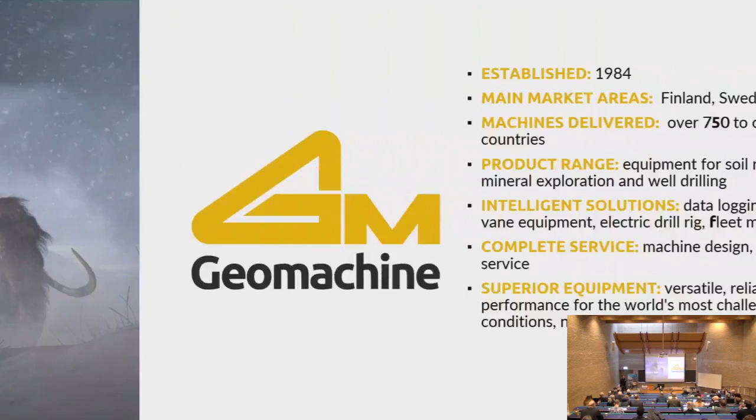So it turns to be 40 years old company this year, mainly operating in Scandinavia, also some rigs to Canada. Russia used to be the market, but no longer. And really the product range has been more in the soil research, in the geotechnical drilling. And also Geomachine has manufactured a few, let's say, traditional geothermal rigs to the 400 meters deep and so.

And where we come to this deeper geothermal drilling, we call it semi-deep. So we are drilling about 2 kilometers deep holes with our drill rigs. So we come from a different angle. So most of the discussions today have been about how to come from the oil and gas industry to geothermal.

And in Finland, I just checked, there's about 10,000 geothermal wells drilled each year. And normally it's been raising, so it used to be 10 years ago 200 meters, now I think the average is about 300 meters or even more.

And many companies are now targeting deeper, and we saw this Espoo exercise with ST1, they tried to go to 7 kilometers, and actually the drill rig is kind of developed based on those experiences. And we saw earlier that the cost curve really, it's not linear, so the deeper you go, the higher the cost curve goes.

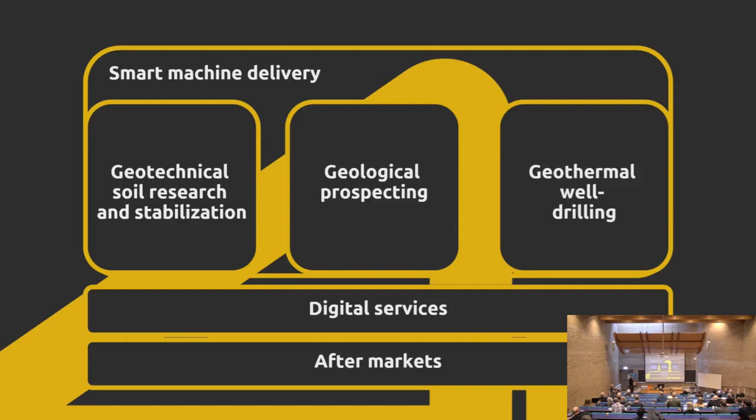The rest is more about this GM2000. This is now the only product we're making for geothermal. We actually quit manufacturing the GM400, which used to be the normal rig, and this is what we're putting our bet on.

About the market needs, why we decided to go this way is because we see geothermal as the future. One of the main drivers is that instead of drilling 60 holes in a new area, you can drill 1 or 2 holes. There really isn't enough area in the places where you need geothermal energy. Based on our customers' calculations, for 300 meter wells, you can actually get the same energy amount from 1 hole that you would get from 60 traditional holes.

Now that we have the rig, we've been marketing it quite actively, and we've started receiving contact from different companies for different applications. We started only for geothermal, but now we have a couple of projects starting or in the offering phase for using deep holes as carbon sinks, one for hydrogen storage, and also one project starting for lithium extraction. They all need to go into hard rock at 1.5 to 2.5 kilometers deep.

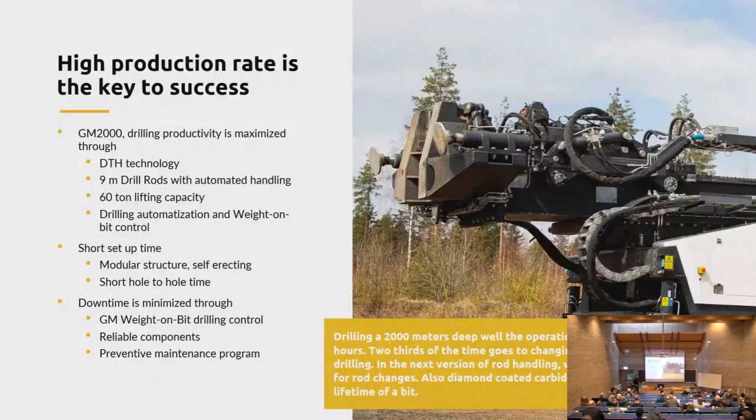So a little bit about the overall system. We have the GM2000, which is a drill rig with a DTH hammer system, so it requires a lot of air. In traditional 400 meter wells, you only need one 35 bar compressor. When you go to 2 kilometers, you need 2 or 3, and we're not sure if we need a booster. Currently the customer has the compressor, and they were able to go to 1.8 kilometers without any booster, just by adding airflow — so 2 to 3 compressors and no booster is the current setup.

When we talk about automated drilling, we can now control the drill rig pretty nicely, so it can adjust and keep the weight on bit stable, keep the torque stable. If something happens, it helps — you don't need to do it yourself. But the next phase should be to integrate the air control into the same system, to track how much flow you have, how much cuttings are coming out, and so on. That's not currently in the same system, but we can follow it up from the pad, though it's not controlled in the same system yet.

How much time do I have? So I think I more or less covered this already.

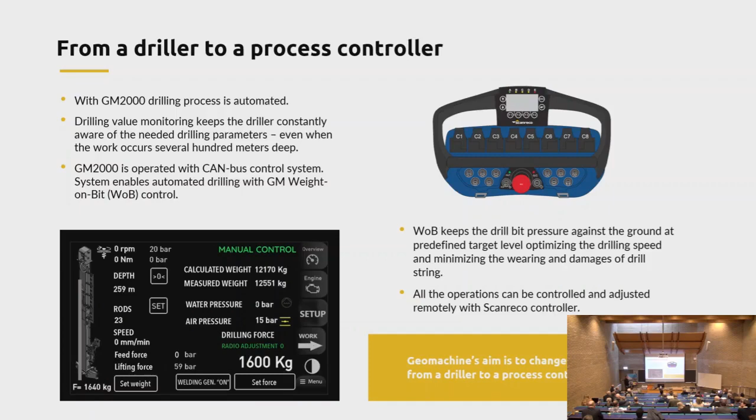This is the other part - we've done a lot of development on measuring what's happening in the hole, because of our geotechnical background, which used to be our only product: producing information from the hole. Now we're putting similar technology, adjusted a bit, into this application, because we're using a down-the-hole hammer. It's more difficult because we're hitting all the time, so you don't get all the information we get on the geotechnical side. But there is development going on now to get measurements from the hammer as well.

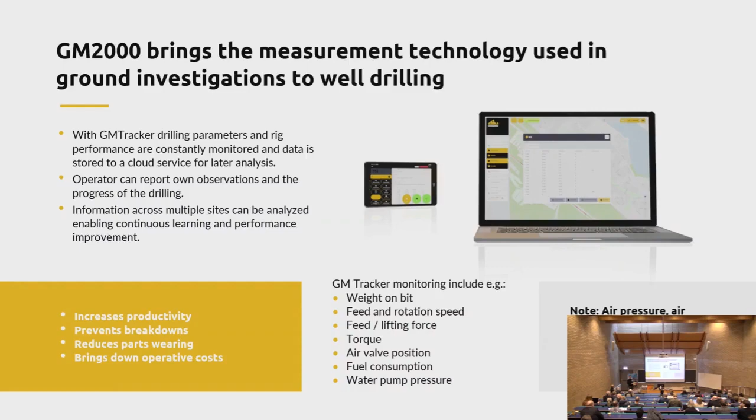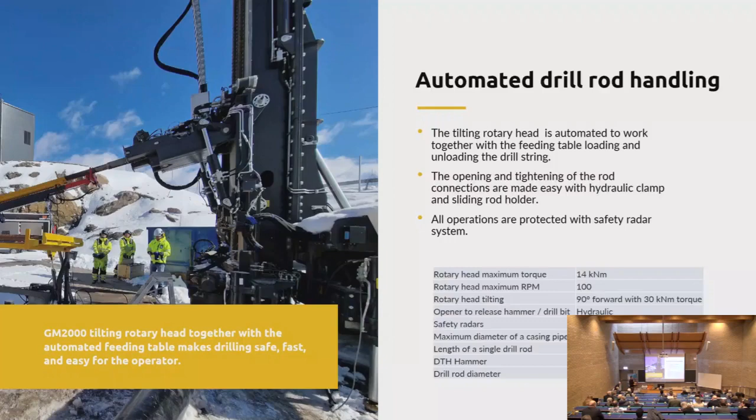Maybe just one last point - easy mobilization. I think this is key, that you need to be able to move it easily. It can't require a huge area to drill, so it needs to be easy to set up and easy to use.

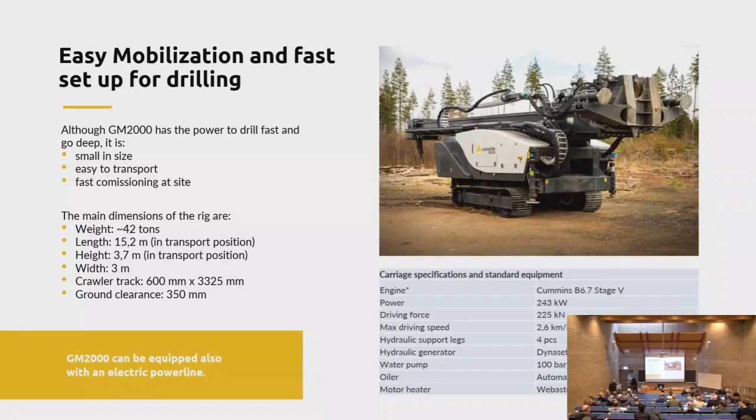The target would be - I was just counting - if we go back to here, you should be able to replace 60 normal wells with that one. If we count 10,000 euros per each of 300-meter wells, it should be 600,000. So then it would be about the same. But right now it's not yet competitive. If you compare this to 60 normal 300-meter wells, it still costs, and probably will always cost a little bit more, because the advantages come from having smaller space and other things. But the market price, what I heard, is around 1 million, what you can charge for one of these holes - in Euros, yes. We are not that advanced yet, but I don't know the exact figures, just the ballpark.